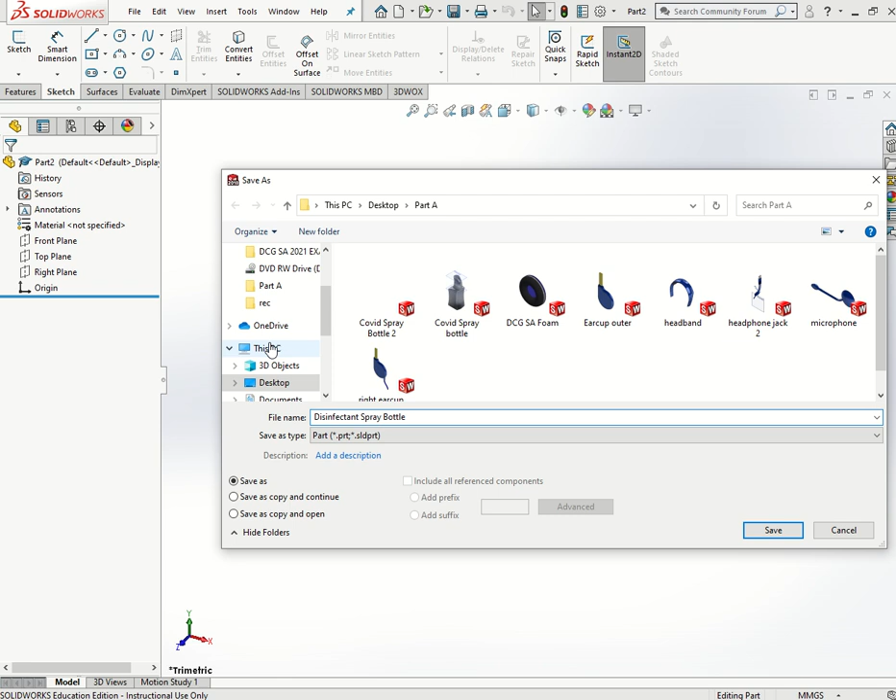I'm going to save it to my desktop, and I'm going to call it Disinfectant Spray Bottle. Okay, so at least I know where I have it saved. It's going to be on this PC in the desktop, so I'll be able to find it easily and know the location of it.

What I can do afterwards is upload that to OneDrive, so I can access it from any computer. So what we're going to start with is the right plane, because the bottle is going to be facing towards us, so the body shape is going to be on the right plane.

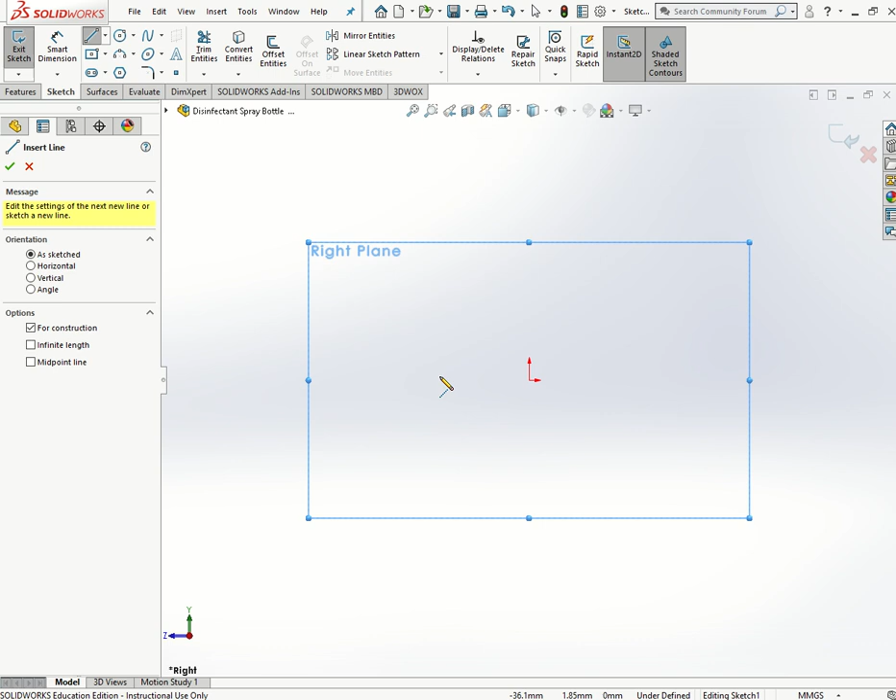So I select the right plane, I select sketch. It already gives me a normal to view, so I'm going to start with just getting my basic shape set up. So I'm going to start with a base center line.

I'm going to hit escape. Now what I want with this base center line is I want the center of my construction line to be on the origin. So I'll right click on that line, select midpoint, hold control on the keyboard and select the origin. Over here then in the relations I'm going to choose coincident, and this means that wherever I move my dot, it's going to always be in the center of the origin.

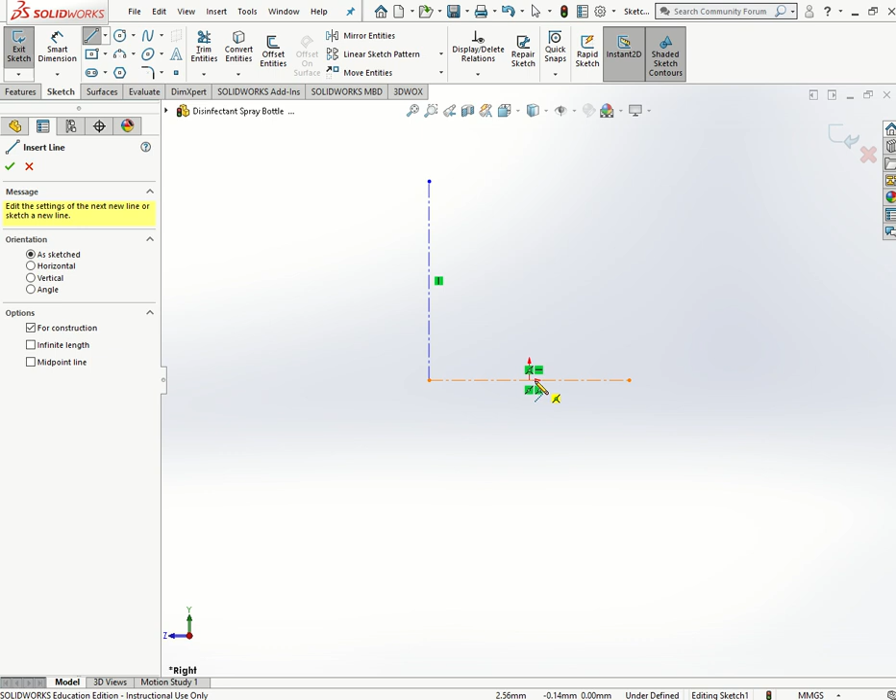I'm going to draw another 3 center lines, one for the left, hit escape on the keyboard, one up the middle, hit escape on the keyboard, and one on the right. Again, hit escape on the keyboard, making sure all 3 are vertical.

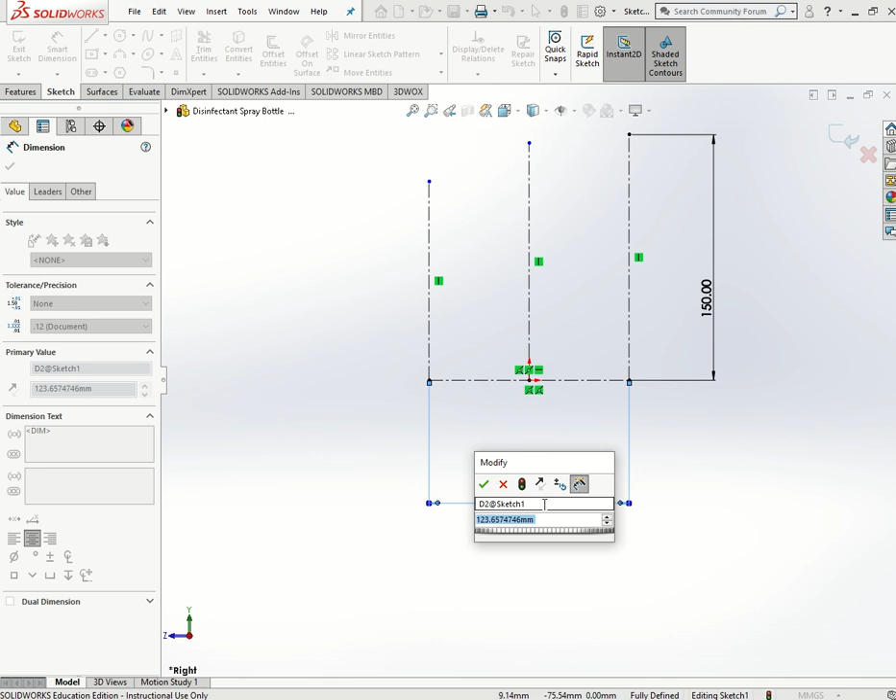These are going to be my guides. So I'm going to smart dimension the right hand side because the maximum measurement of the bottle is around 150 millimeters. The base of the bottle is around 95, and the left hand side is around 130.

Okay, the middle line is just going to provide us with a guide for the middle. Okay, so now with that, once I'm finished with my 3 measurements, you can notice how as I dimension the sketch, the points and the lines are turning black, which means I'm fully defining them.

And the middle one again is just a guide, so it doesn't need to be fully defined, but what we can do is maybe position it so that it is horizontal with the highest point. Select the 2 of them and choose horizontal, so now it is turned black as well.

Okay, now what I'm going to do is use the spline feature, which is going to create the curve of my bottle on the left hand side. So I'll start here and click 2 points, then hit escape, and as it looks at the minute it just looks like a vertical line. However, when we select it we can see that it has these arrowheads and diamonds, and that means it is a spline that created it.

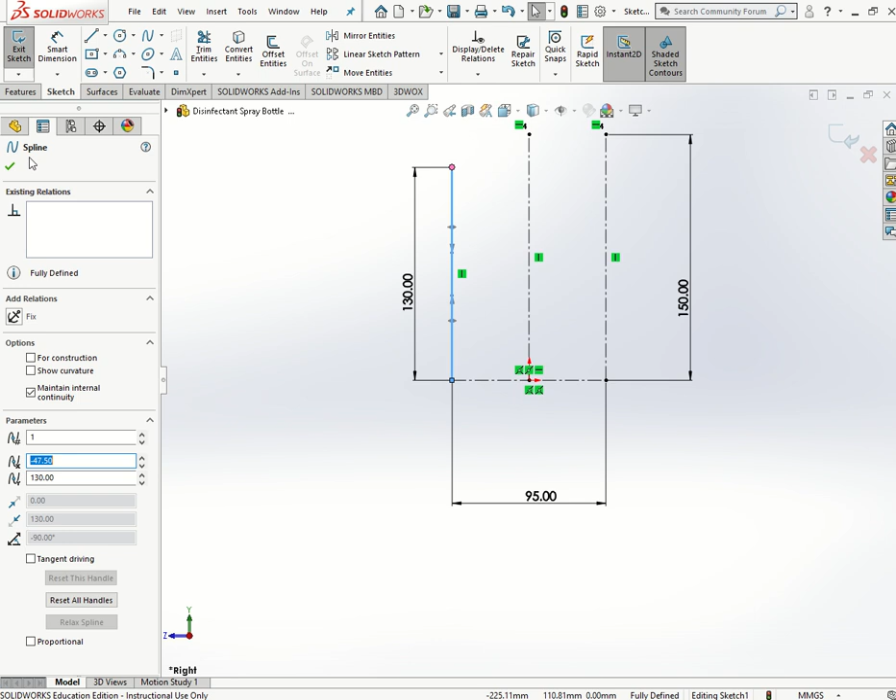You can see over here on the left, and if I choose the diamond head I can manipulate the curve to create my shape. Okay, I'm happy with that shape. I'm going to do the same on the right hand side. Again, hit escape on the keyboard, select the line again and choose the arrowhead.

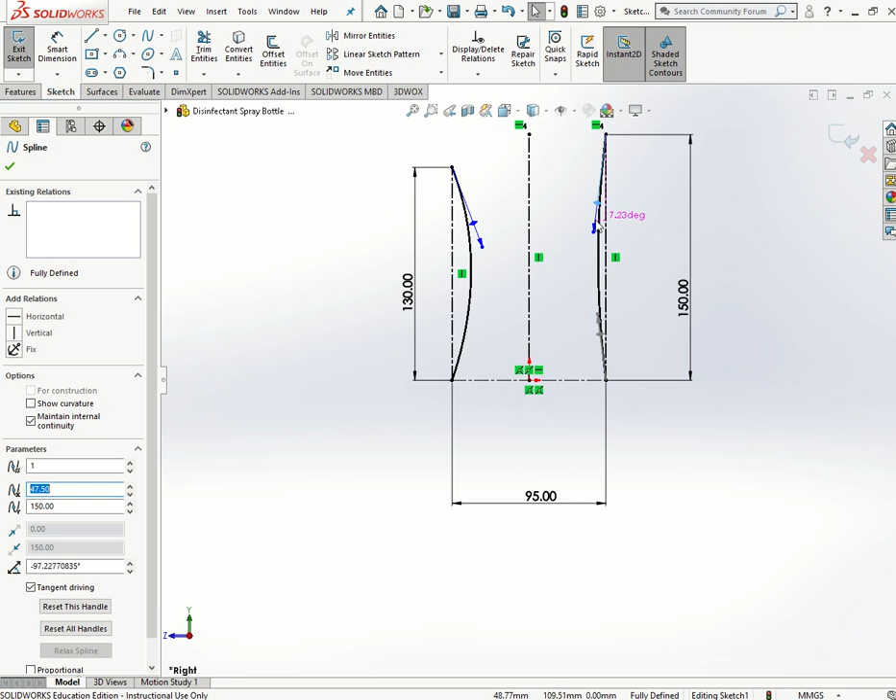I'm going to tweak this back a little bit and do the third spline, which connects the two. Again, hitting escape on the keyboard, selecting that line again and choosing the arrowhead.

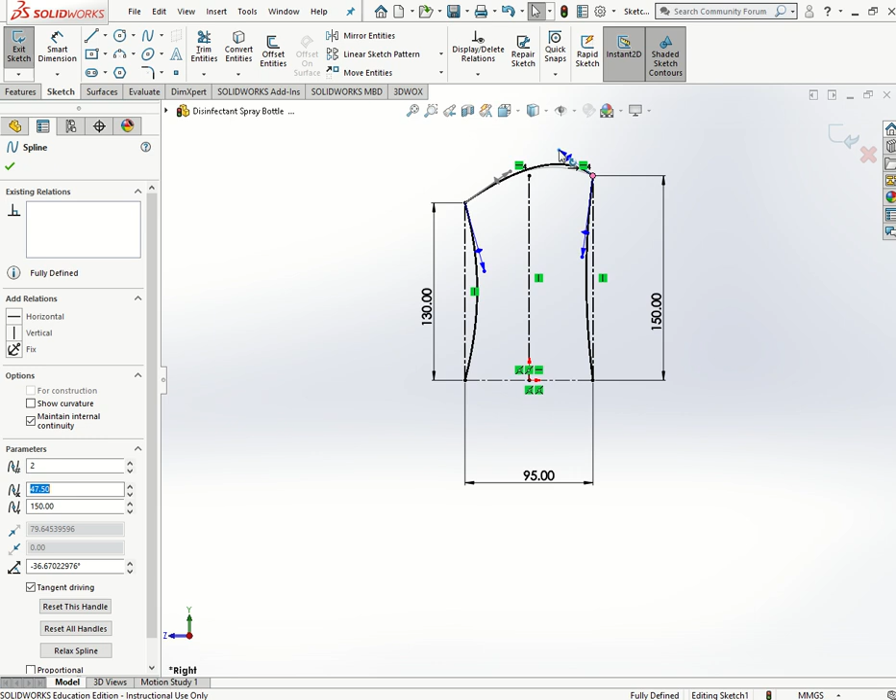Now when we look at our disinfectant bottle, the curve is mainly to the right hand side, with a higher point there. So I'm going to take the arrowhead and reduce it so that we get a bit of a different curve.

I have to close off the sketch at the base with a horizontal line, and when I do this you can see a blue shape, a preview, come up to say I have a closed shape that can give me a feature.

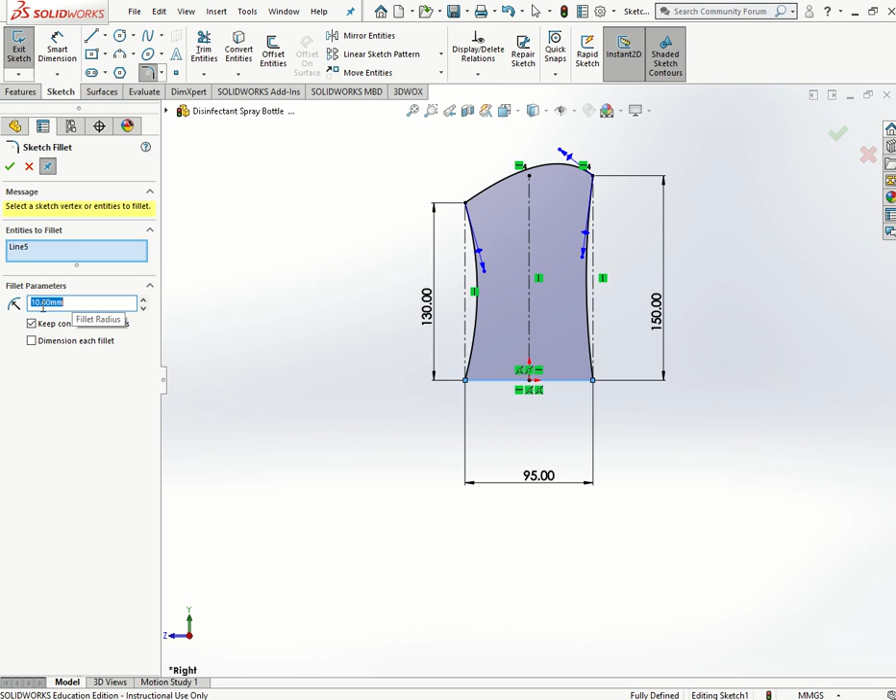Now I'm also going to add in my two curves at the top, so I'll choose my sketch fillet. The radius I want for my fillet is 10 millimeters, and I'll zoom in and select my point. As I do it you can see a preview pop up. I'll choose this other point over here. I'm happy with those two, so I'll hit the green tick. Now it has turned blue again, but it should still be fully defined.

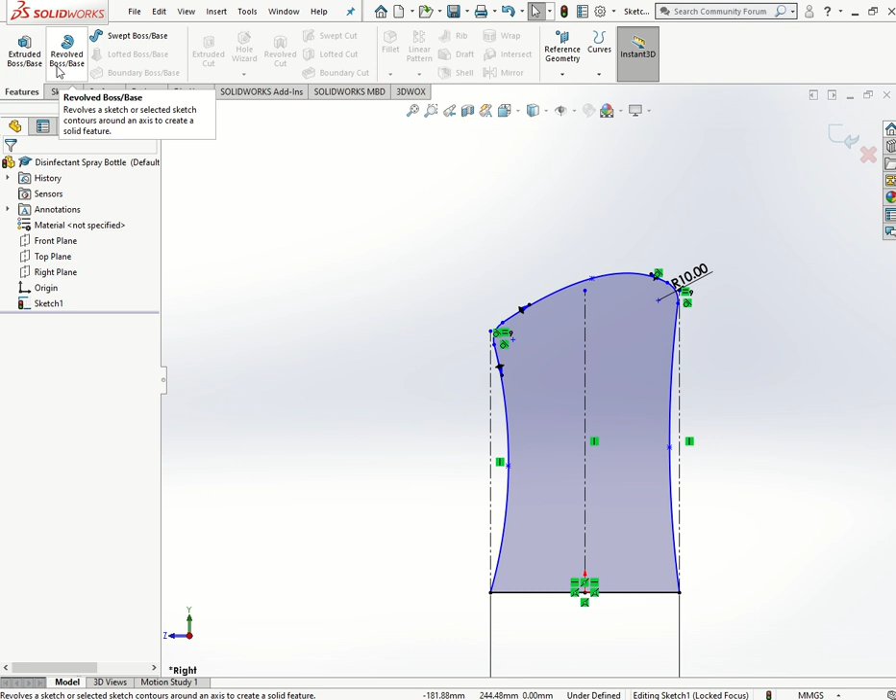I'm very happy with that shape, so now I'll go to Features, Extrude Boss or Base. Instead of choosing blind, I'll choose mid-plane, which will keep it centered on the plane I drew it on, in the middle of the object.

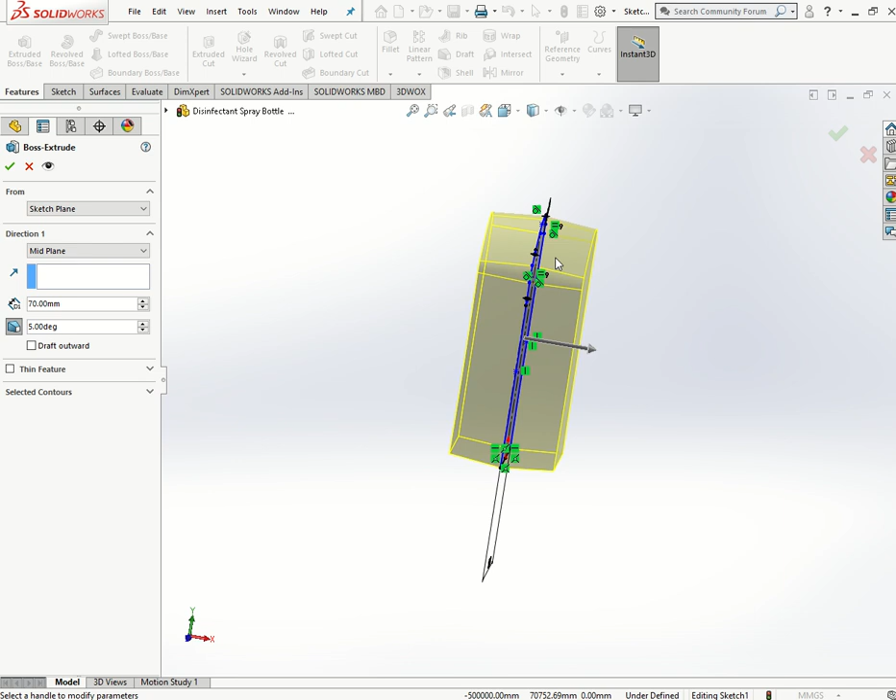I'm going to increase the size of the extrusion to 70 millimeters, and also put a little draft or taper on the object, so that as it moves out from the center it gets a little bit smaller in both directions, as you can see there. I confirm that, and that's given me my taper.

There's going to be a little bit of an issue at the bottom here, since it's going to be sitting on one point, but we'll sort that at the very end.

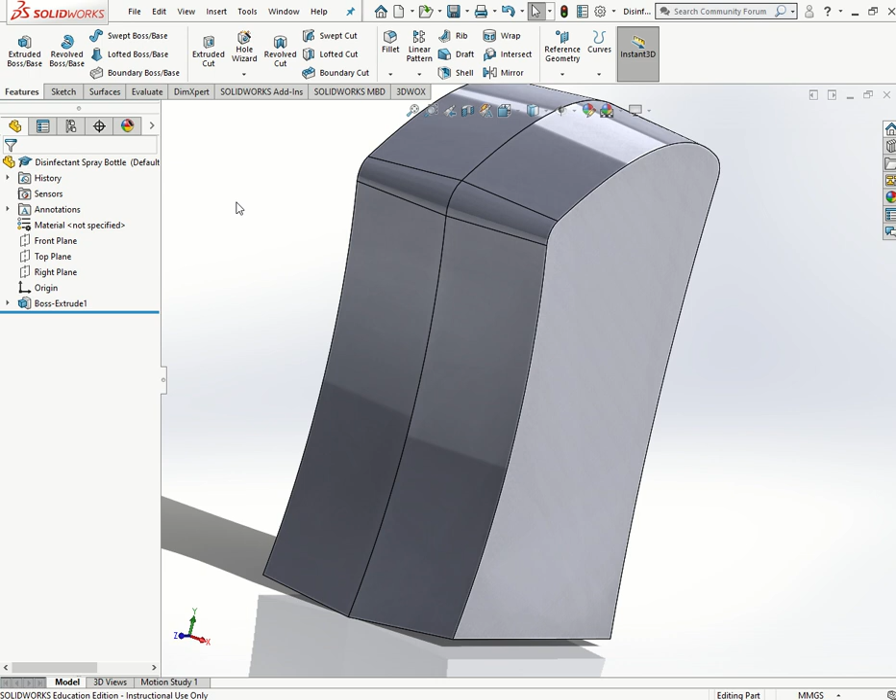There are still a few unrounded edges, so I'm going to use my fillet feature now to round off the edges. I'll start with radius 10 and maybe change that afterwards if I think it's too big, so I'll choose the front face.

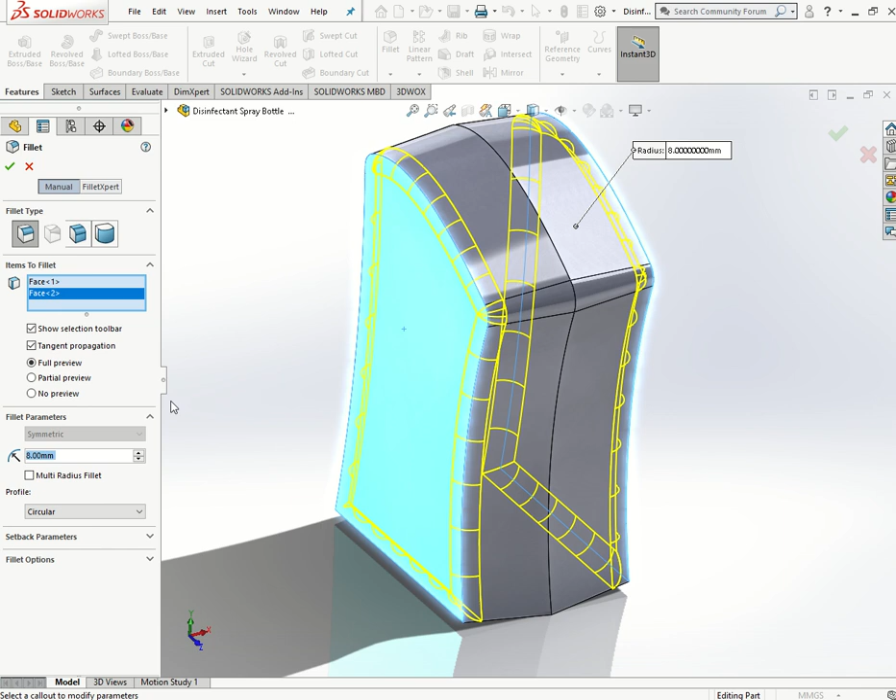As you can see, the preview here on the bottle goes all the way around. This other front face, I'm going to just change that to 8 millimeters. See how it goes — I think that's a little bit more appropriate for what we're looking for.

If I get a view without any lines, I'm pretty happy with how we're getting on there. I'll hit the space bar, get my 3D view back shaded with edges, and I'm happy with that. I'm also going to make sure perspective is on, so as it gets further away we get a realistic view.

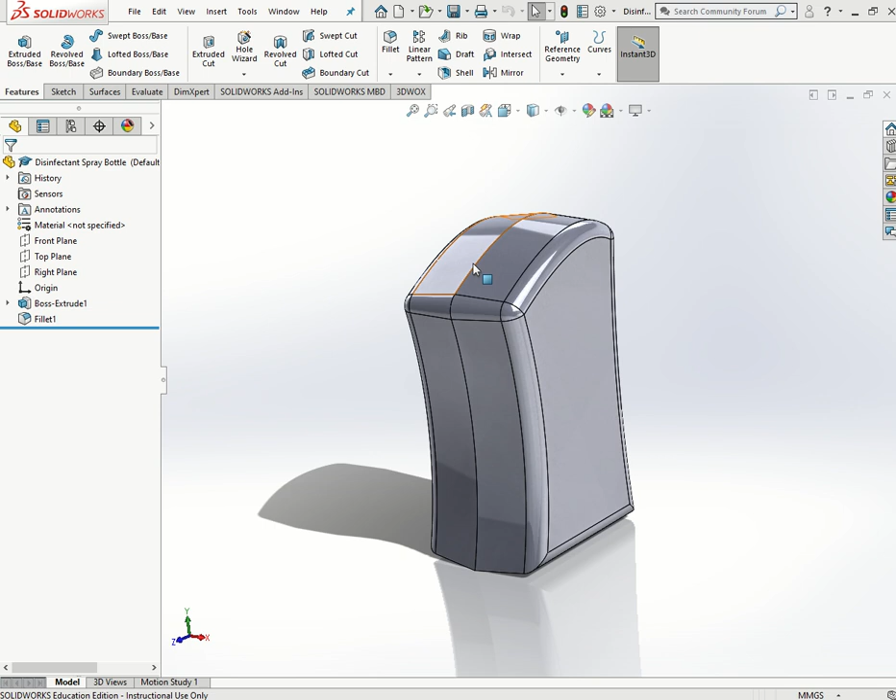That is generally the bottom body formed. Now if I wanted to make any changes, I could go over here to the left and right click on Boss Extrude, which created it. I can edit the sketch, or I can edit the feature.

So if I wanted to maybe make it thicker, or take the draft off it, or change the sketch, so change the curves that originally created the object, I could do both there.

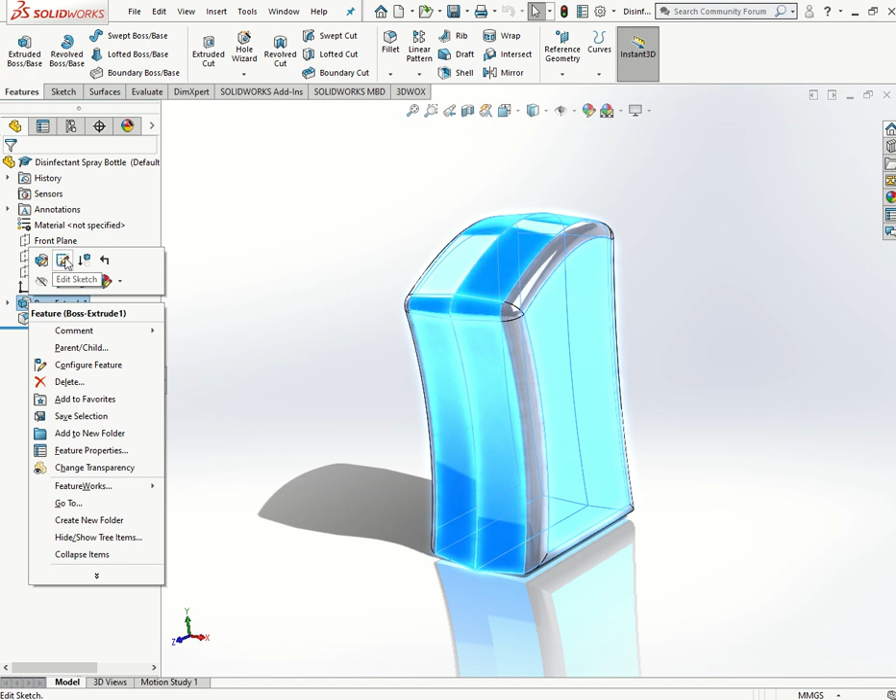Now what I'm going to do is just rename it. I'll click once, wait a couple of seconds, and click a second time, and I'm going to call that the body.

We'll just call it maybe the main body, and the fillet is the round over of the object.

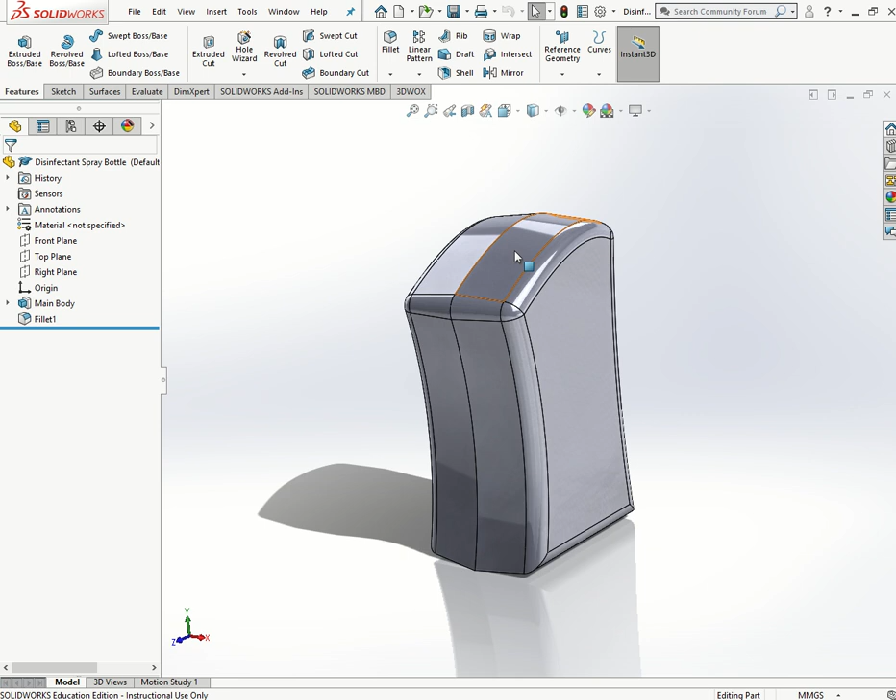Now what I'm going to do is create the neck of the bottle. If we go back to our picture, we can see we're going to create this neck here. This bottom shape is an ellipse, and this top shape is a circle, so we're going to use a loft feature going from the ellipse up to the circle.

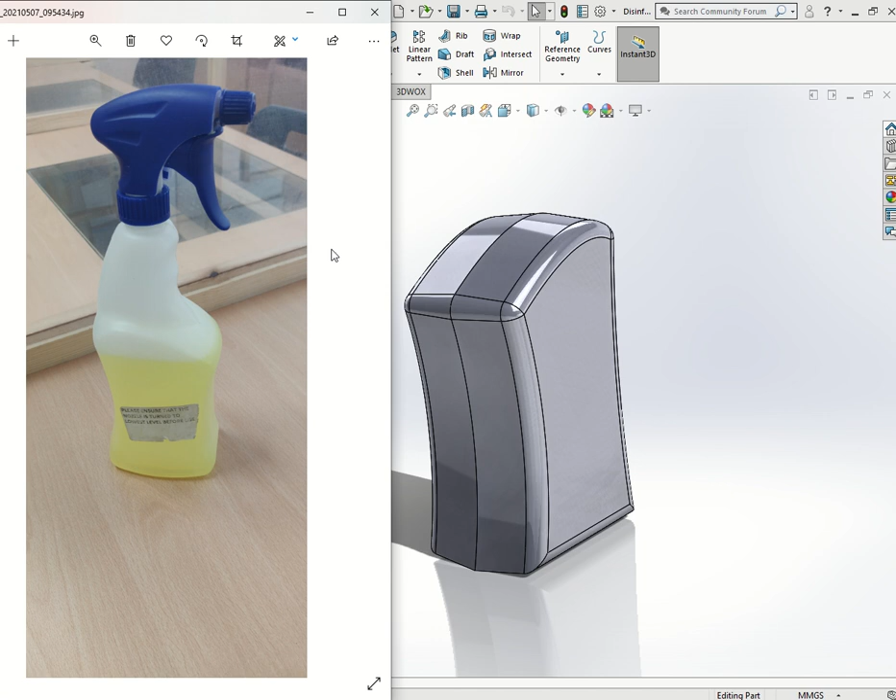So what I need to do is create the ellipse first. I'm going to use a reference geometry plane, and create a circle using the same feature, then loft between the two of them and create guide curves. So we have a lot of work just to create this shape, but it will pay off.

So what we're going to do now is make sure I've told the computer I'm finished with everything. I'm not in a feature or a sketch at the minute. I go to reference geometry plane.

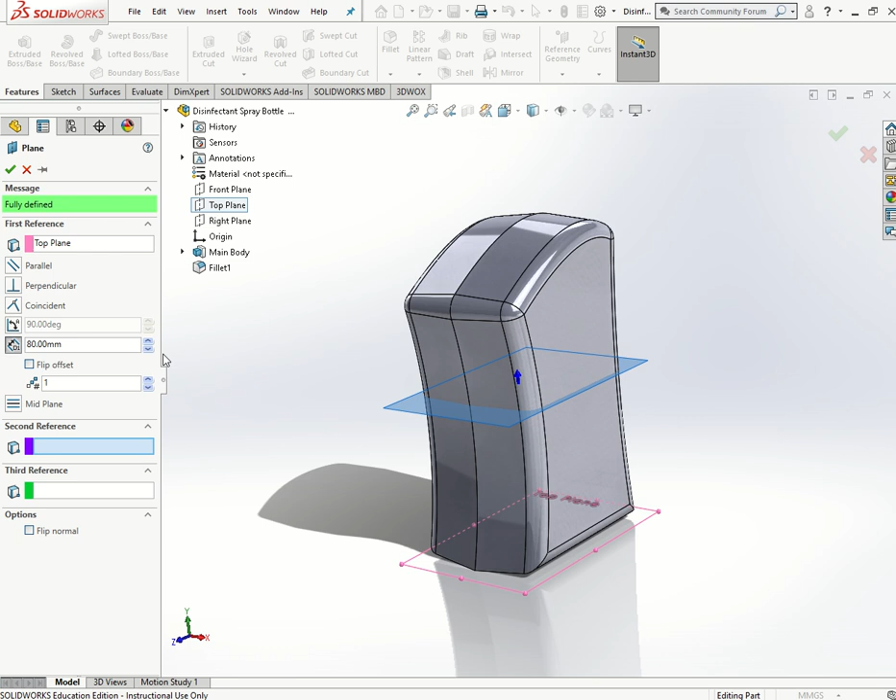Now it asks me for a reference here. I'm going to open up the design tree on the side and choose the top plane. The distance that I want between the top plane isn't majorly important, but I'll go with 130 for now. I'll hit the green tick, and that's the position of my plane. I can rename that plane as ellipse plane.

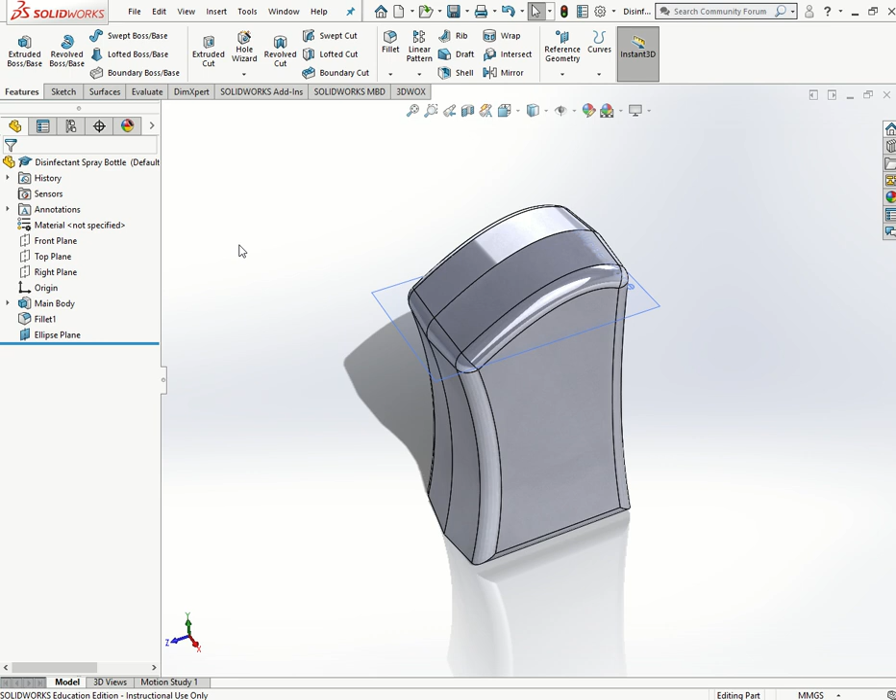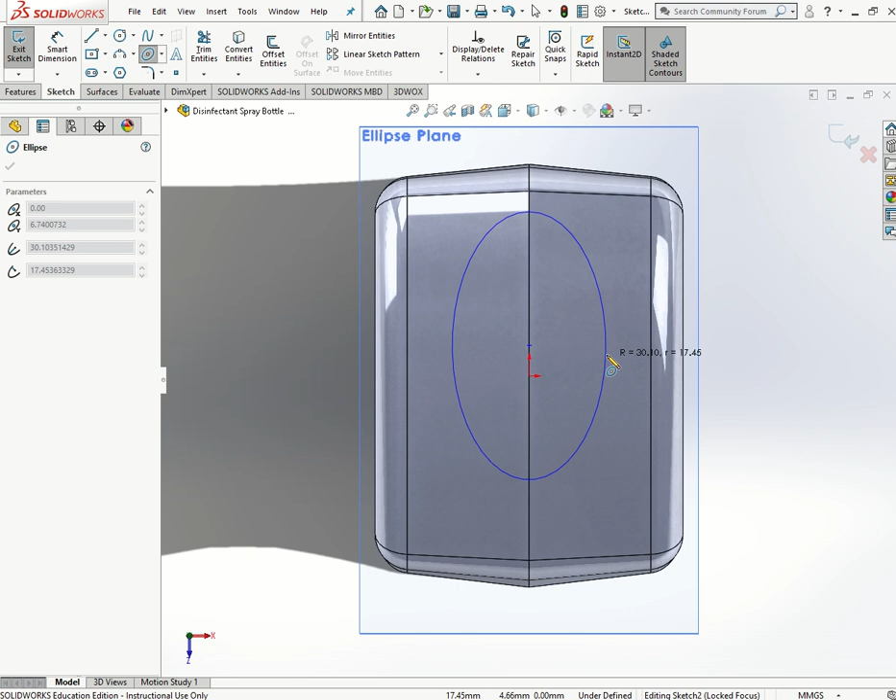Select the ellipse plane, sketch onto it, spacebar to get my 90-degree view, and use the ellipse tool. When we use the ellipse tool, we just do 3 clicks: the first is the center of the ellipse, the second dimensions the major axis, and the third dimensions the minor axis. Once that's done, I just have to dimension it.

So the center point of the ellipse is going to be coincident with the center, and the top point is also coincident with the center. All I need to do is put some sizes onto it, so maybe 70 millimeters by 40 millimeters. It hasn't turned black yet because the position of the ellipse is unknown, so we need to lock it into a position.

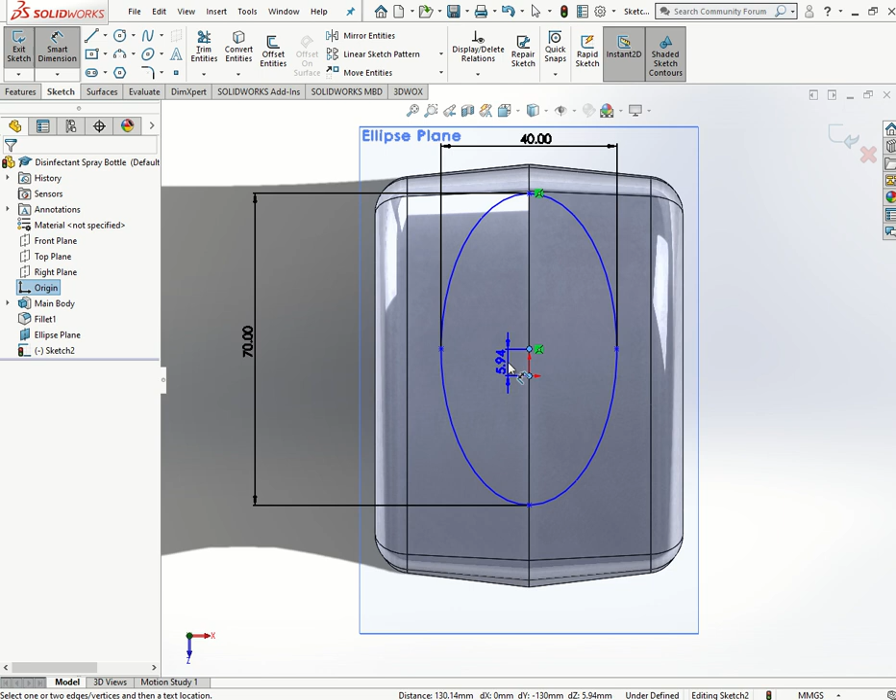So I'm just going to choose somewhere close to there. I'm going to dimension the center of my ellipse from the center of my bottle to be 6, and I'm happy with that position. As you can see, it's fully defined, fully turned black, and I'll confirm that. Sketch 2 there, I'm going to rename as ellipse.

Now I'm going to create the exact same thing for the circle above it. So I'll go to reference geometry plane. The reference I want to use is this plane, and the distance between the two of them is going to be 80 millimeters.

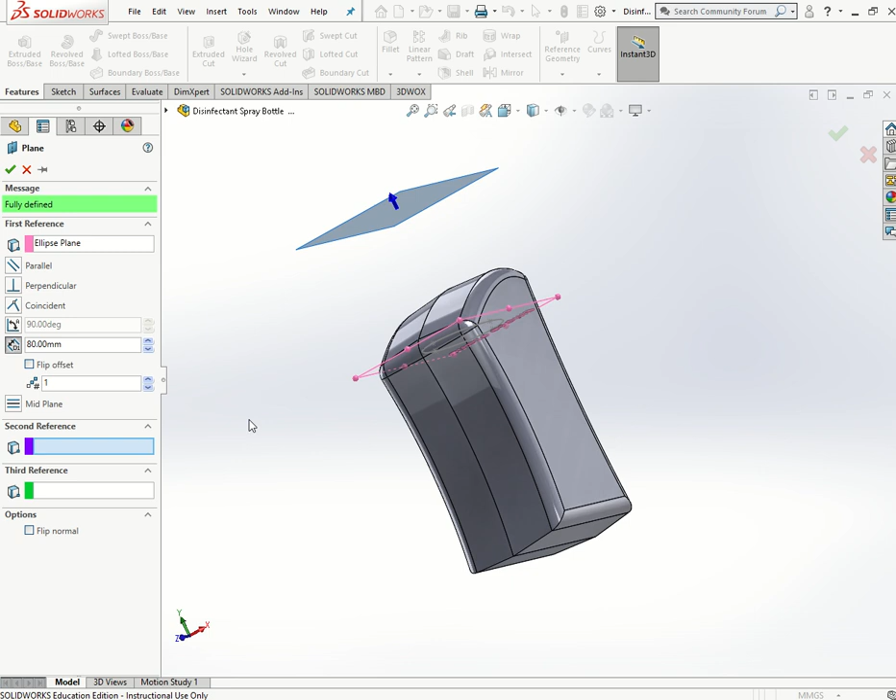Thereabouts. Again, measurements for the minute aren't essential, but when you're making a real-life object, you do want to have it as close as possible using round numbers. So I'm happy with that. I'm going to rename that plane to circle plane, confirm, and create a sketch on that. Spacebar, normal to, go to sketch tools, create my circle.

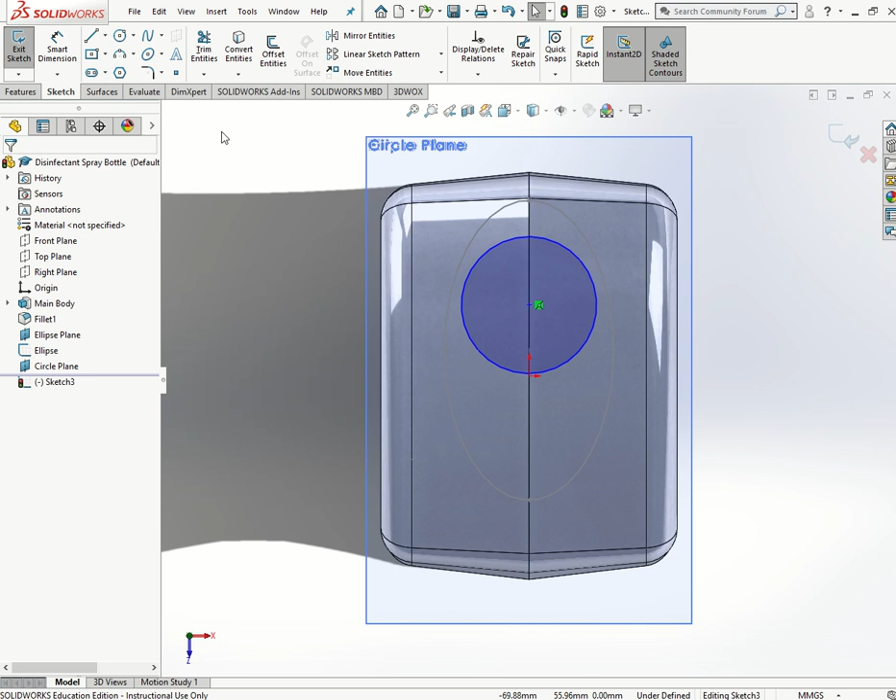Now the size of the circle is roughly about 40 millimeters, and the position of my circle is just off center. If we look at the bottle, the circle, if this was the center of it, it's just off center towards the back, and the same with the ellipse towards the back side. So we make sure we try to accommodate for that.

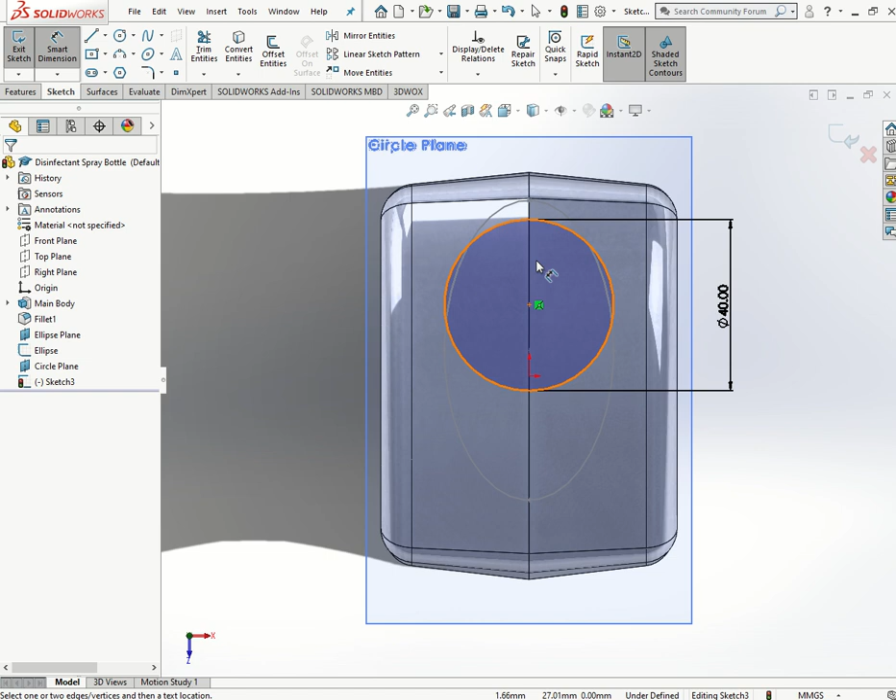So the smart dimension here is going to be quite narrow. We'll go with 5 millimeters, quite close to center. Again, we can change that if it doesn't look right afterwards.

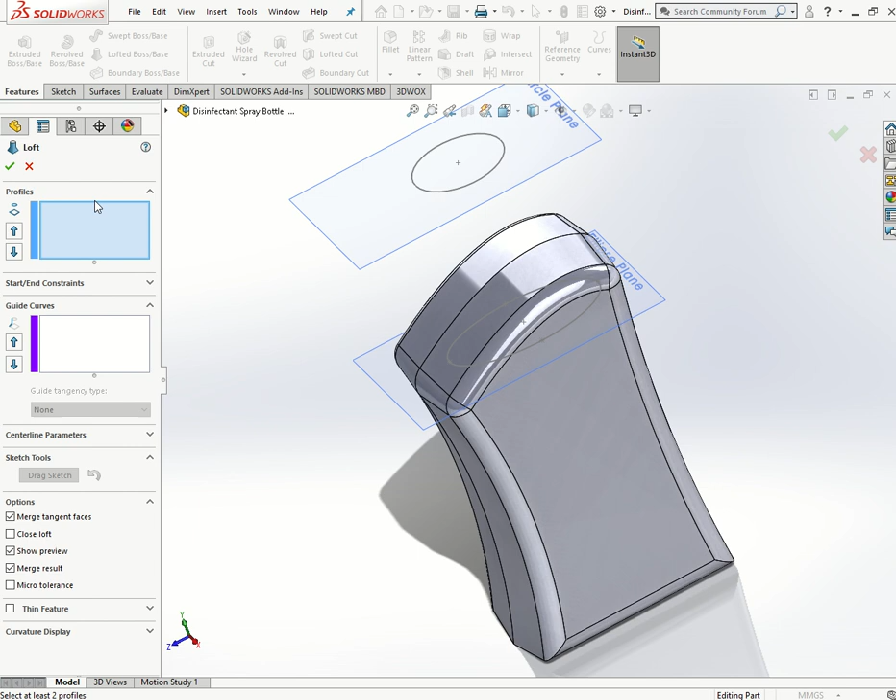So now what I have is a circle and an ellipse. What I'm going to do now is loft between the two of them just to see what I have. I choose my loft feature, and in the profiles I'm going to select my ellipse and select my circle. As you can see, we get the neck of the bottle.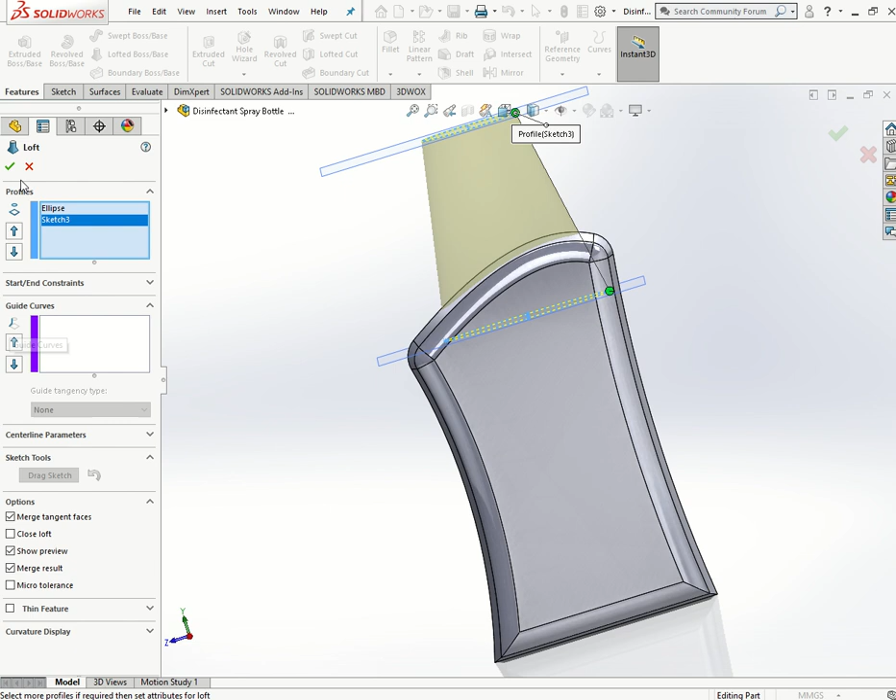However, we're lacking the curves at the front and the back of the neck, and that's where we're going to add in our guide curves. You can see an example here with this icon that it's going to predict the path between one profile and the other profile. So at the minute, I'm not going to confirm that.

Instead, what I'm going to do is create my back guide curve profile and my front guide curve profile. On the right plane, I'm going to create a sketch, spacebar, normal to, and again we're going to use spline, just drawing it out to the right hand side initially. Hit escape, and I'll get a 3D view here now.

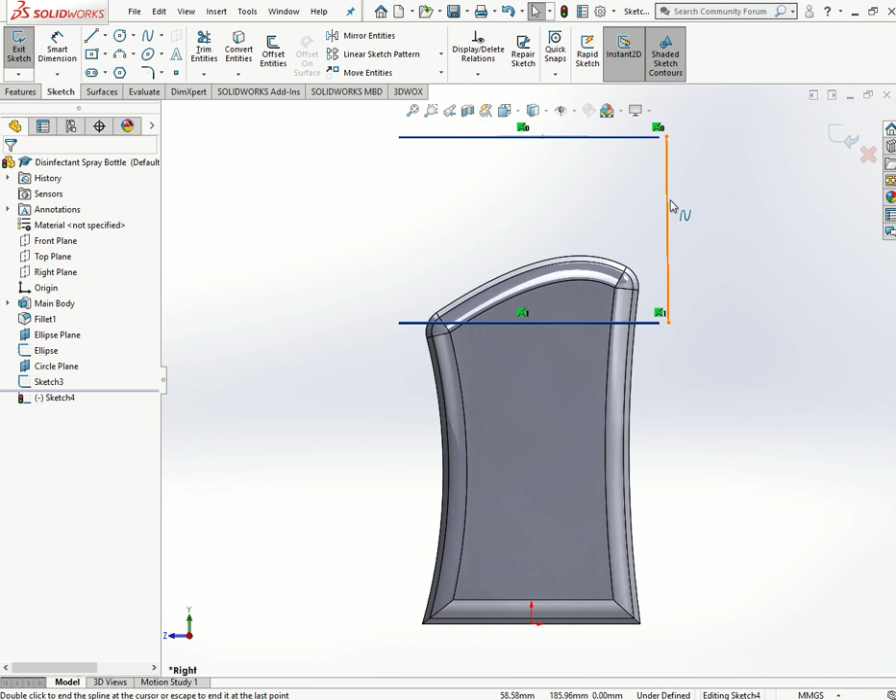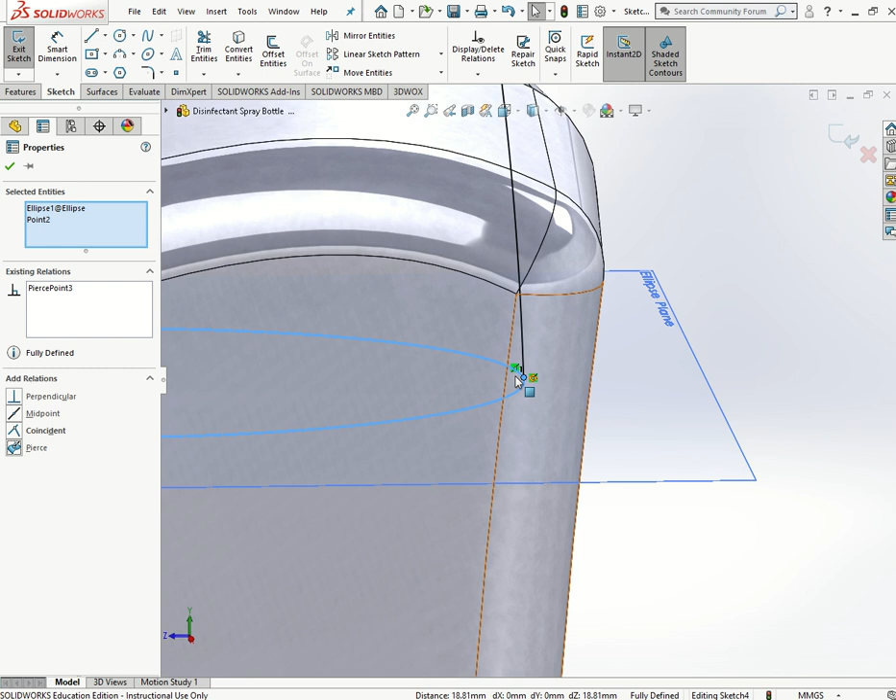If I click on the spline to create a rough curve, I can select my top point, hold Control, select a circle, and use pierce as my relation. I'll do the same at the bottom, select the point, hold Control, zoom in and select this point here. I'll just select the curve because I always want the pierce feature, and it will pierce to that point automatically. Now I have a rough enough curve there.

But again, if I look at my bottle, I can change that around to be a little bit more appropriate. We can shorten the top curve if we wanted to, and that will give us a guide curve. If I click on this bottom one here and manipulate that, I can make it a vertical profile if I wished, but I don't for this situation, so I'll just let it come back out first and then curve around. Again, we can manipulate those curves by changing our two arrowheads and our directional diamonds.

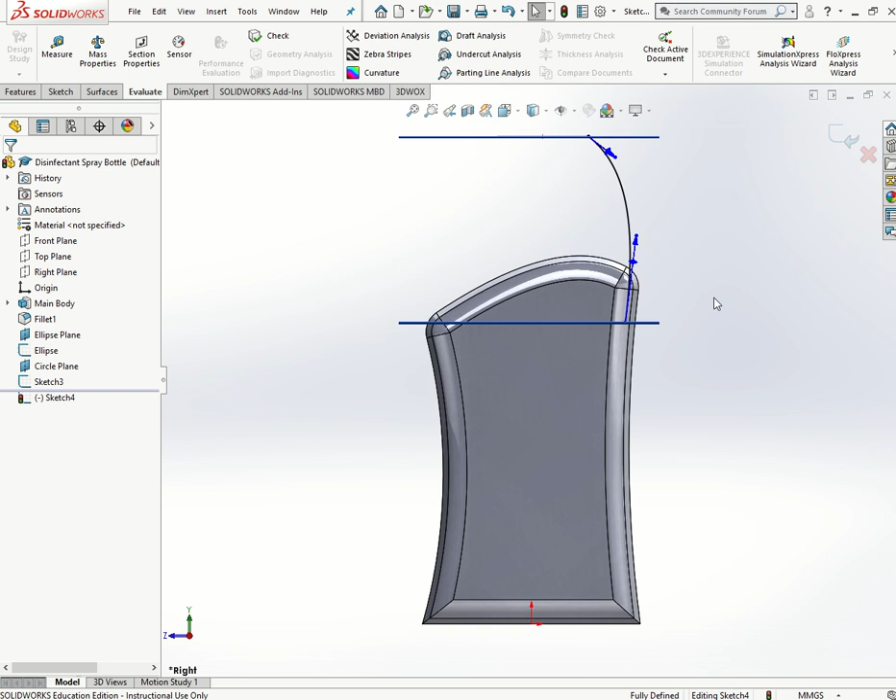Okay, so that's guide curve 1, I'm happy with that, that's the back curve. I'm going to rename this - I have Sketch 3 here, I forgot to rename as the circle, and Sketch 4 here I'm going to call the back guide curve. As you can see, I'm currently out of the sketch, I have no sketches created, and I have 3 sketches so far for this neck: the ellipse, the circle, and the back guide curve.

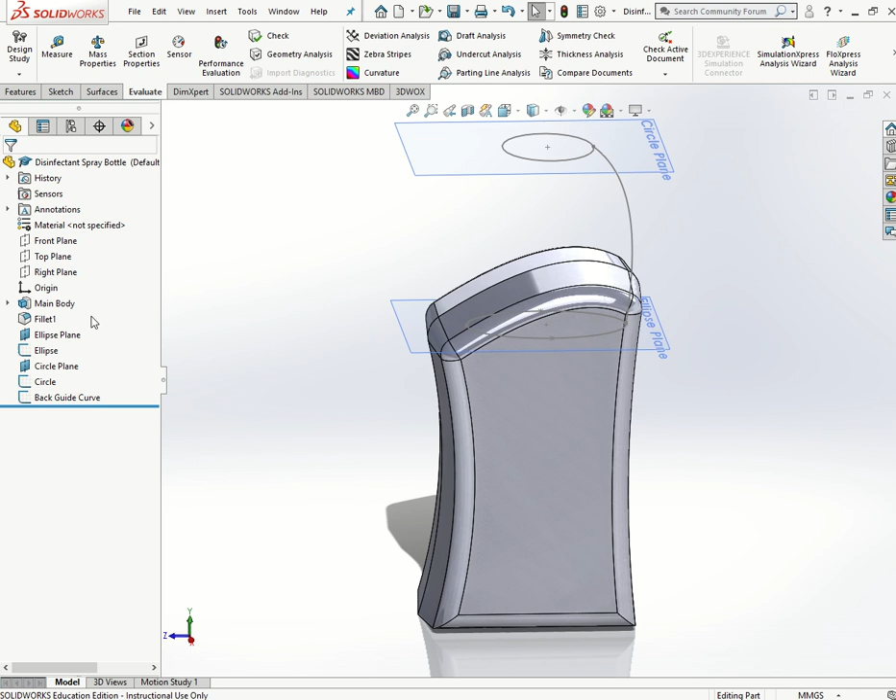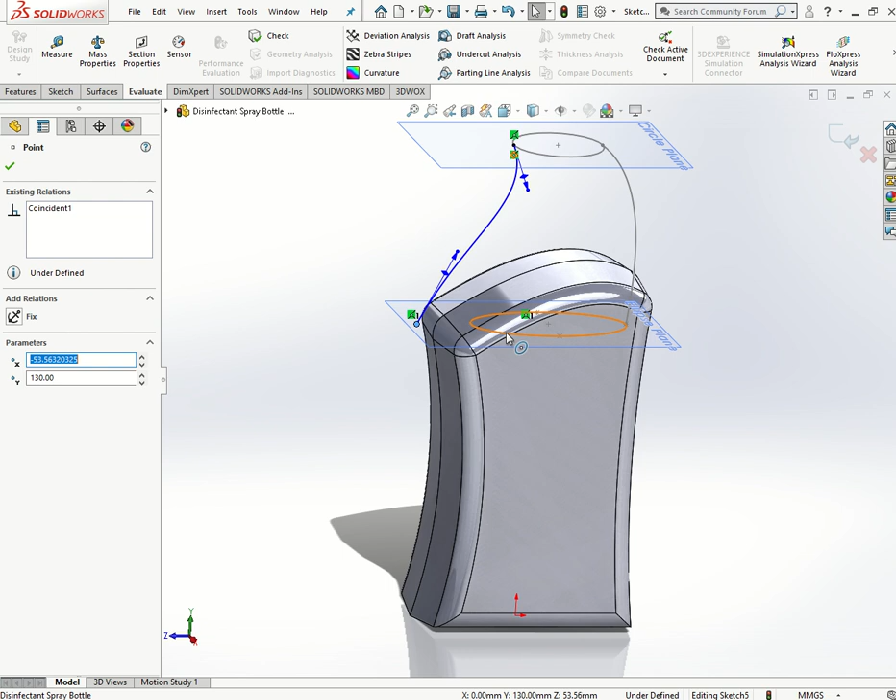I'm now going to create the front guide curve. So I'll do the same thing: right plane, sketch, create a spline. We go normal to, click it out to the side, hit escape, click back onto the ellipse, get our curve. We can manipulate it a little bit. Then I'll get my 3D view, select the point, hold control, select circle and pierce, select the point, select the ellipse and pierce.

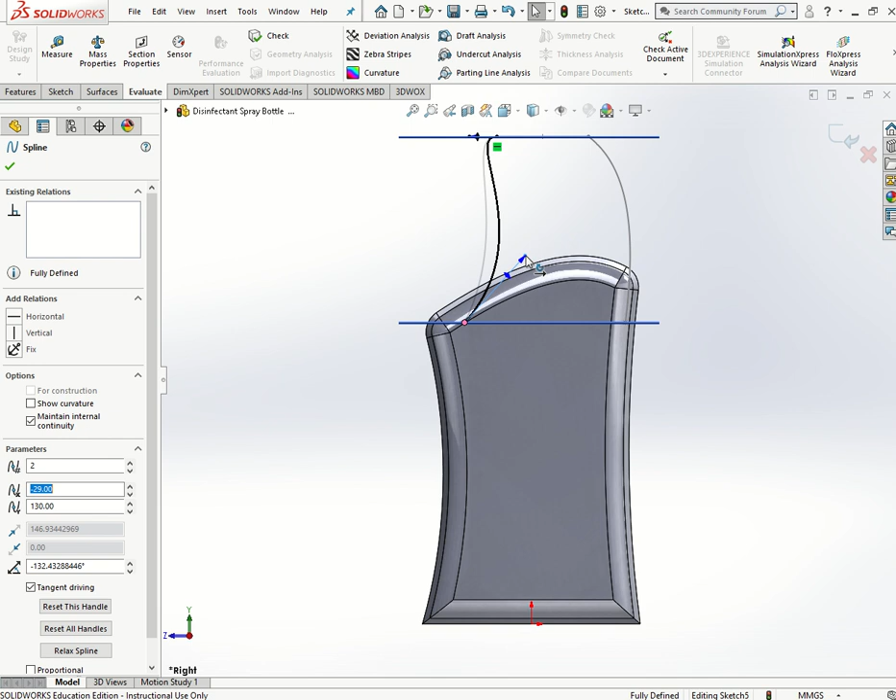Now if I look at it at a normal to view, again I can change my curve in accordance with my front curve. So what I might want is I might want it to come out, I might want this little curve here. Actually what I might want is for that to be horizontal. I might want to elongate that or shorten that, and again I might want to elongate this curve or shorten it depending on your shape. So if I'm happy with that...

I'm going to confirm that and I'm going to call that my front guide curve. So I'll call this my front guide curve.

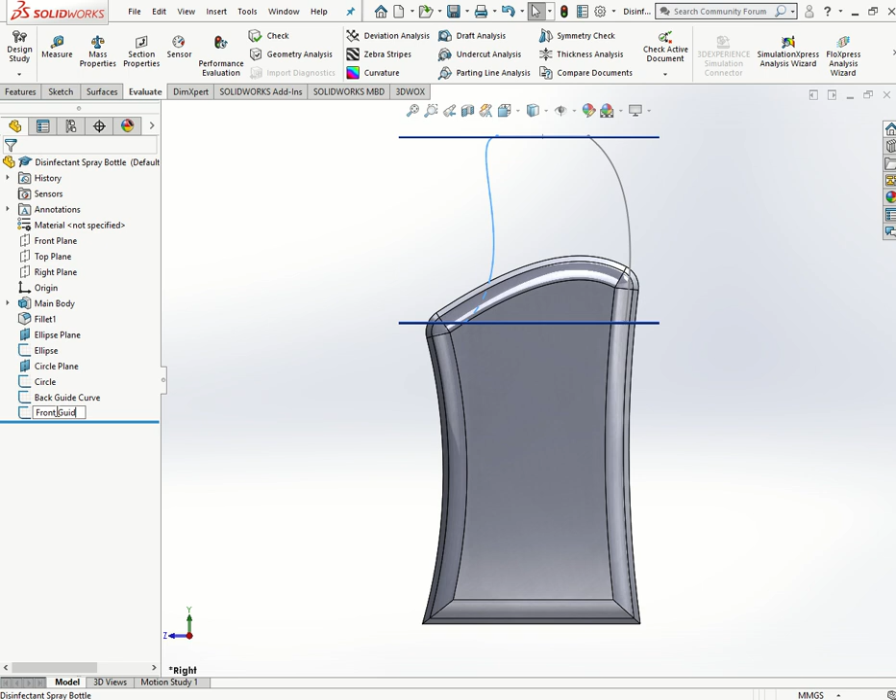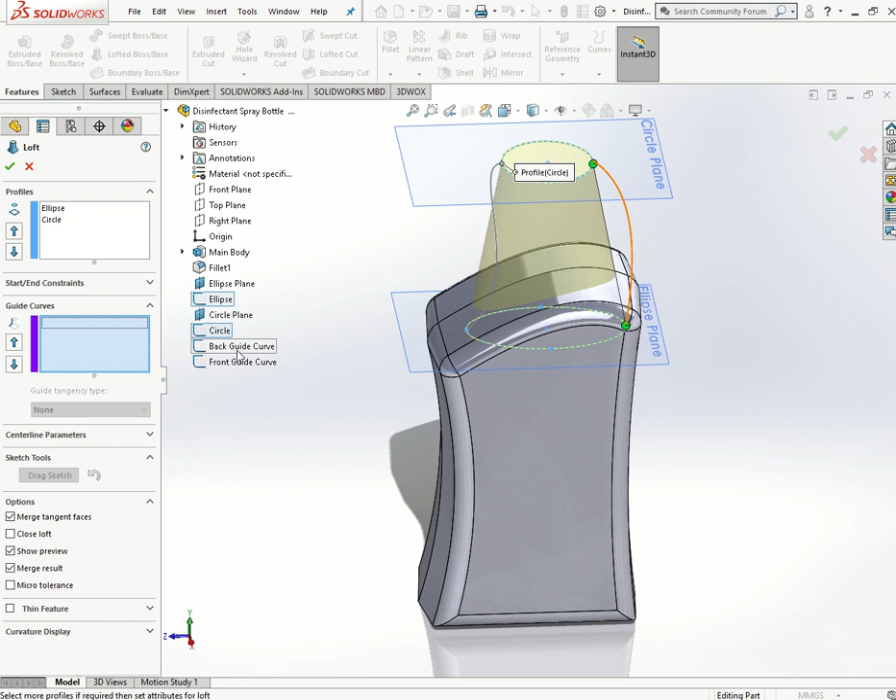Now what I'm going to do is loft between the two of them. So if I go to features, loft, choose my ellipse, choose circle. The curve I want between the two of them is to be straight. Then the guide curve that I want to select is back guide curve and front guide curve. Hit confirm, and we now have our neck.

If we add in a fillet around here, we can soften that edge a little bit. Okay, and that's how I'm going to create my neck.